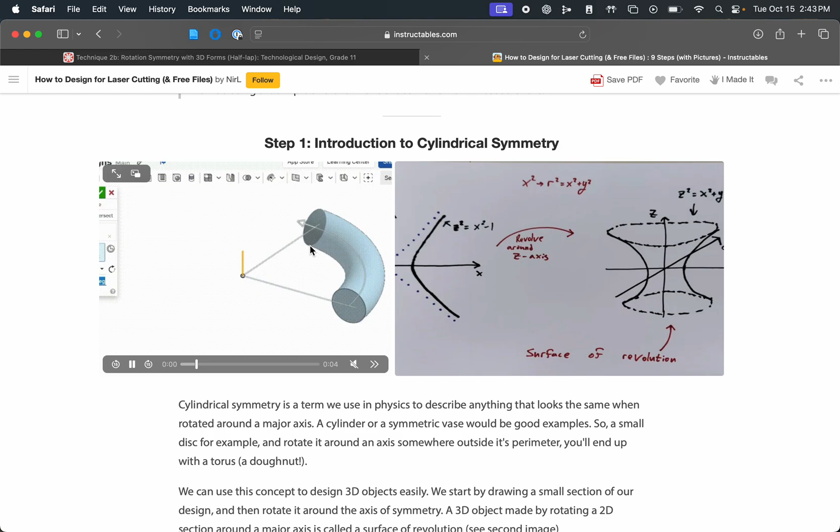So this Instructable is for Onshape, and I'd like to give it a try in Fusion. So I'm basing what we're doing here today off of this technique. We're going to be using something called the revolve pattern and the revolve tool and a circular pattern to create those flat slices and spin them around an axis.

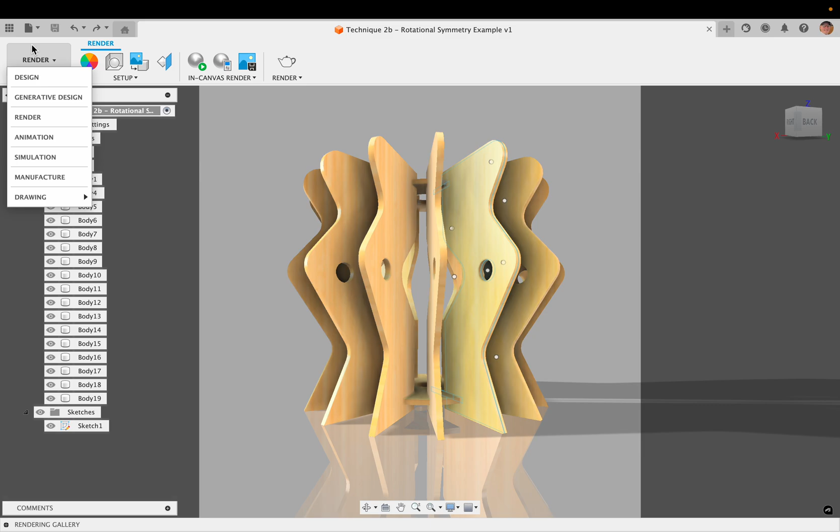Okay, so my example looks like this. I've got about 15 pieces here that I created, and I've got a top piece and a bottom piece, and all of those pieces are joined together. Let's have a look at how they're joined together. They use this half lap intersecting joint.

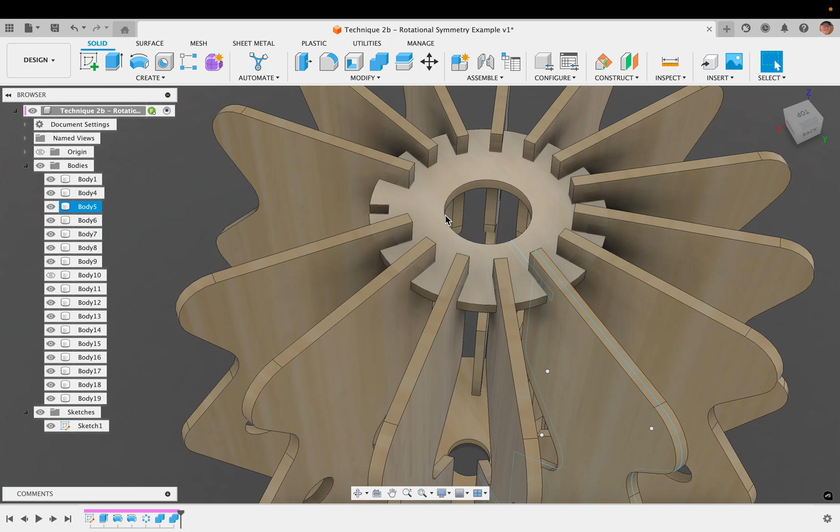And if I take this top piece and hide it, we can see that each of those pieces has got a cutout. And importantly, on this top circle, there's a cutout for each piece as well. So it wouldn't be enough just to do a slot on the one piece and not the other, because the position wouldn't be guaranteed for both pieces. So we need both pieces to fit well together. And of course, we've got that connection also on the bottom piece with the bottom slats as well.

There we go. So if we were to manufacture this with laser cutting as an example, then it would be really easy to put it together exactly as it was intended and exactly as it was designed. So let's start a new file. And I'm going to set up a parameter first. I'm going to press S, and I'm going to change parameters.

And really I need two parameters here. One parameter I need is the material thickness, because that parameter is essential to making these pieces fit together well. For now, I'm going to use exactly the material thickness, which would be 2.8 millimeters in my case. But if I have it exactly the material thickness, even considering what the laser cutter will delete, I still think that's too tight. So I'm going to round it to 3 millimeters. So this will be as per the material, plus a little bit of tolerance. Okay, so a 3 millimeter material will work well.

And I need to know how many copies around the central axis I want. And so for that, I need a parameter with no units, okay? Because it's just a number, so we'll just call this the count. And the expression to start with, well, we'll see what 15 looks like, okay? So with those parameters in mind, I'm going to start creating my sketch. I'm going to make a new sketch on the front plane.

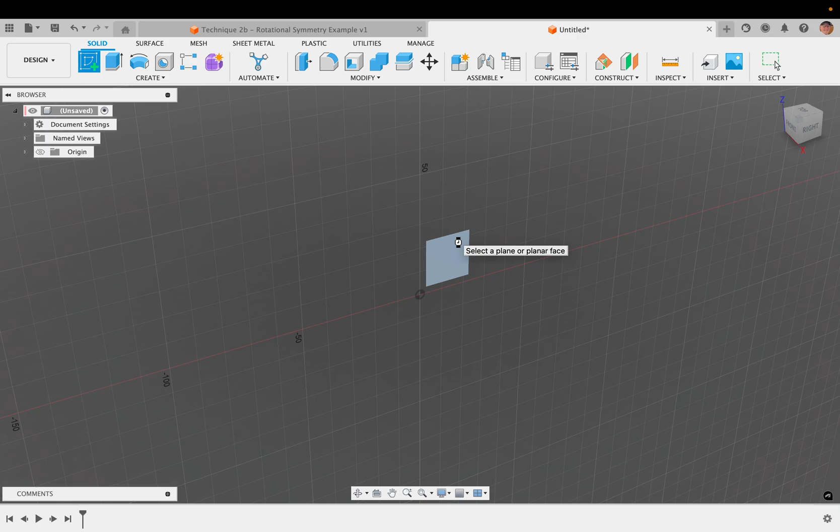And keeping my origin as the center point, this green axis here can be my central axis. I'm going to think about what my part that is going to be repeated looks like. And in this example, it's the section of my design like this. So what do I want this to be? And that depends on if I wanted it to be a vase or a lampshade, a holder, or an abstract sculpture of some sort.

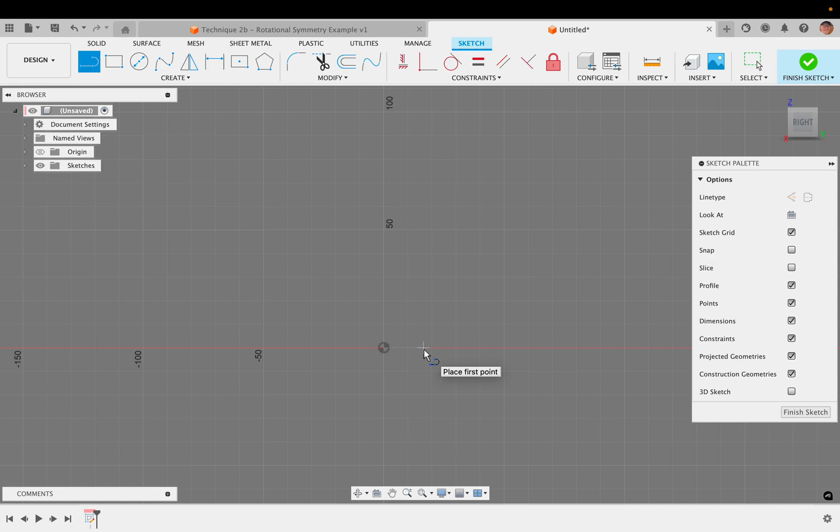So I'm going to use an abstract geometric approach. Okay, I'm not going to start on the origin, because the origin is the central axis through the entire thing. I'm going to start away from the origin, and this is going to be where the bottom of my first section starts. And that size I'm probably going to define, because I want to know exactly what that internal size is going to be. And then this width as well, to really give me a sense of scale here. To have something 50 millimeters will work well for what I'm envisioning.

And then for the internal size, I can do that by the grid. I can do it by eye because I have a line here that's 50, or I can just commit to 15 millimeters there. And that's what I'll do. Okay. And now I'm going to go up, and I'm going to sort of roughly plan how far I'm going to go up.

In fact, to do that, why don't I just pop in a line from the center axis that's vertical to the axis here. And this is just a sketch line, so I clicked on it and pressed X to make it a construction line. And then I'm going to give it a height of something that will help me envision what is the height that I want for my product. I'll say 150 millimeters. There we go.

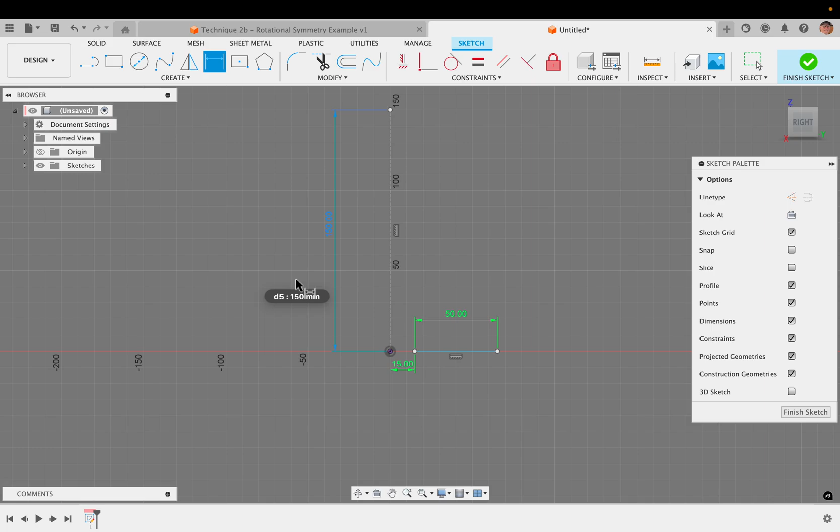So now I know how far I am from the center, how wide my bottom piece is, and how tall the overall shape will be. Now I can proceed with making my design for my section. Here I'm drawn to the idea of an abstract, jagged shape. Maybe it gets more jagged as it goes. Who knows?

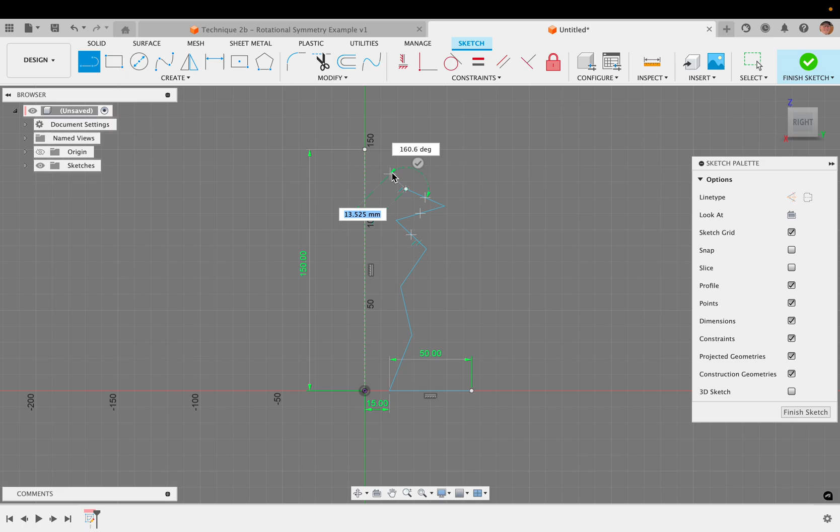Here I'm just hovering over my mouse cursor so that I stay in line with this target height that I set. And then I'm going to do a similar thing on the way back. I could, of course, incorporate other tools. I could use an offset here to capture exactly the size, or I could just proceed with an abstract approach and see how it goes. And today I'm feeling like seeing how it goes.

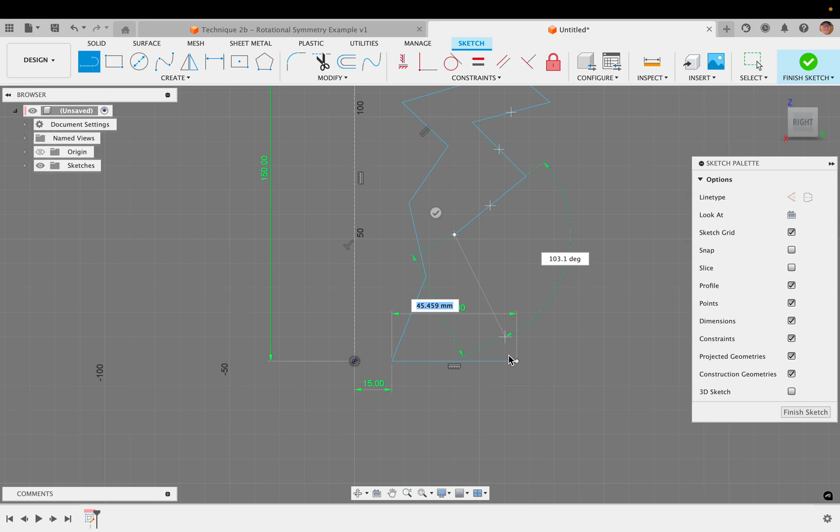This is giving me like Pikachu tail vibes here. Let's see what happens. Maybe lightning, maybe thunder. All right, and I'll just connect it to my bottom side. Now your section might look different. You can trial this with any kind of section you like.

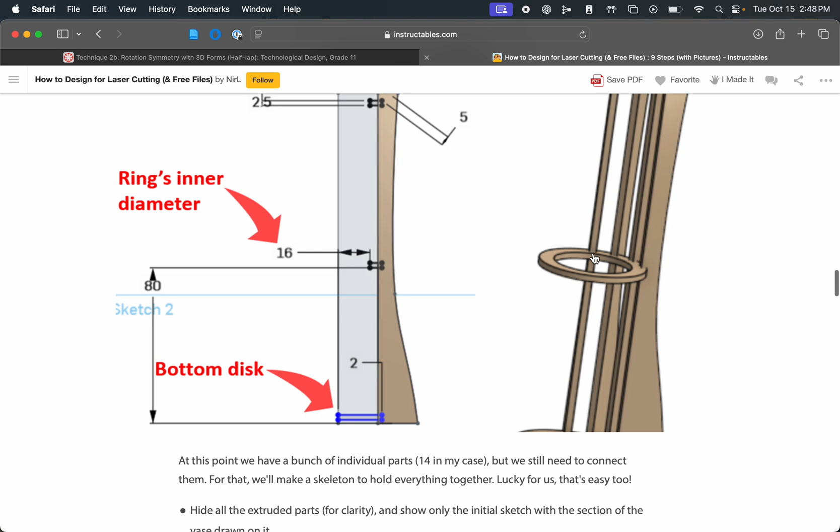Before we proceed, we need to plan where the cutouts are going to be for the central circles, and let me show you in this way. So these support circles here will also be cut from the same sheet material. So let's plan where they're going to go. I'm going to make 2, and the cross section of that circle is a rectangle.

So I grab the rectangle, and I can either connect it to the central axis and not have a hole cut out at all, or I can give it some space. And for this design, I'll give it some space. And I'm not starting from the very bottom either, because I want it to intersect with this piece. I don't want it to form the complete bottom surface.

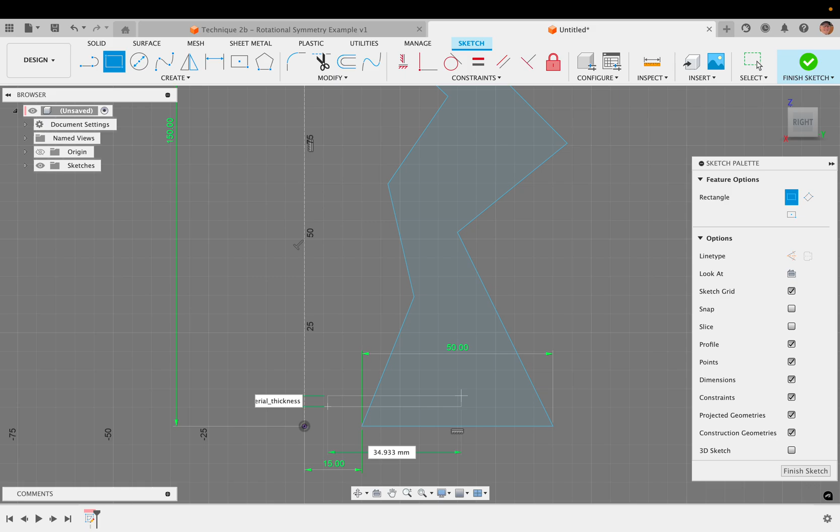The height of this rectangle should also be the material thickness. Okay? And then the distance here can be somewhat arbitrary, keeping in mind the relative size and scale of the rest of the design. Okay? So I'm planning for this bottom support circle to intersect roughly by this amount. And the overall circle is going to be this size.

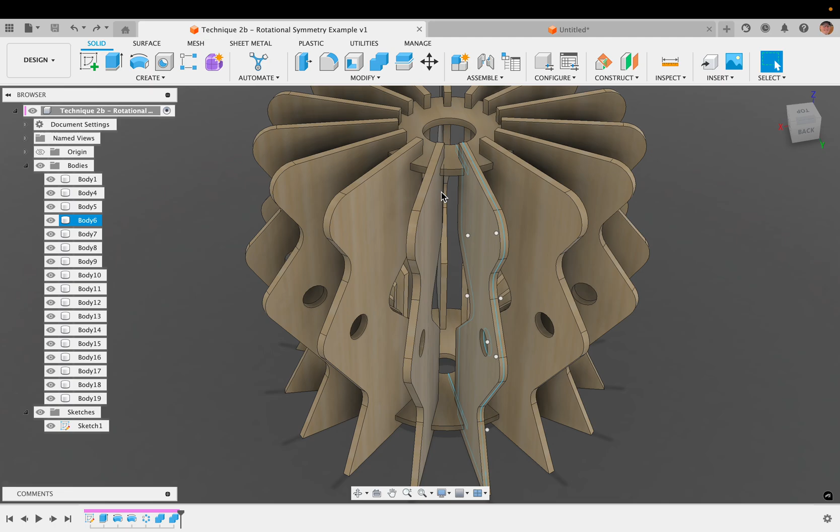But there's really one more thing I need to consider here, which is because they both are going to intersect each other, I'll show you with my previous example. Here we go. In my previous example, this rectangle forms the entire circle, but this part here is the part where they actually are going to intersect. So I'm going to draw a line from this rectangle on my working one so that I can plan to create this intersection.

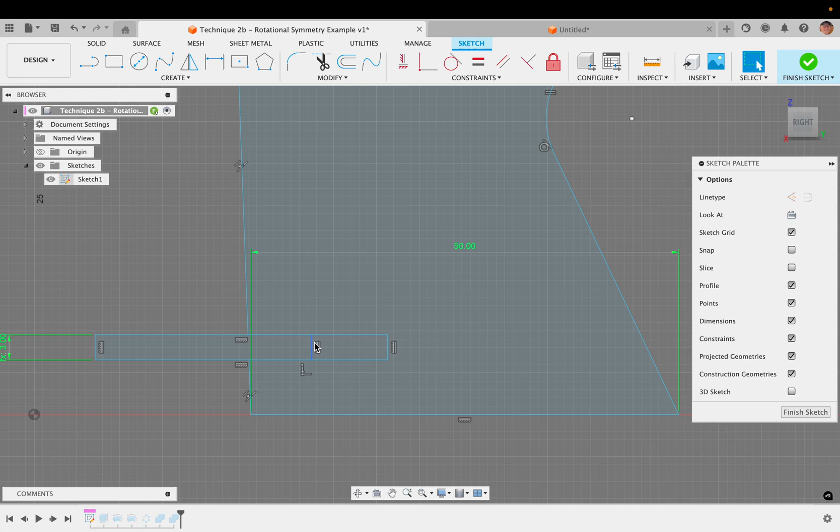Okay. One thing is it will be a little bit easier if I trim off this part so that I have my whole rectangle here. And that'll just make selection of the profiles more straightforward. So now I've got my whole rectangle. And now I'm going to plan where the actual intersection of these pieces go, which will be, in this case, roughly halfway between the edge and the end of my circle shape here. This is perpendicular, so I know that it is straight.

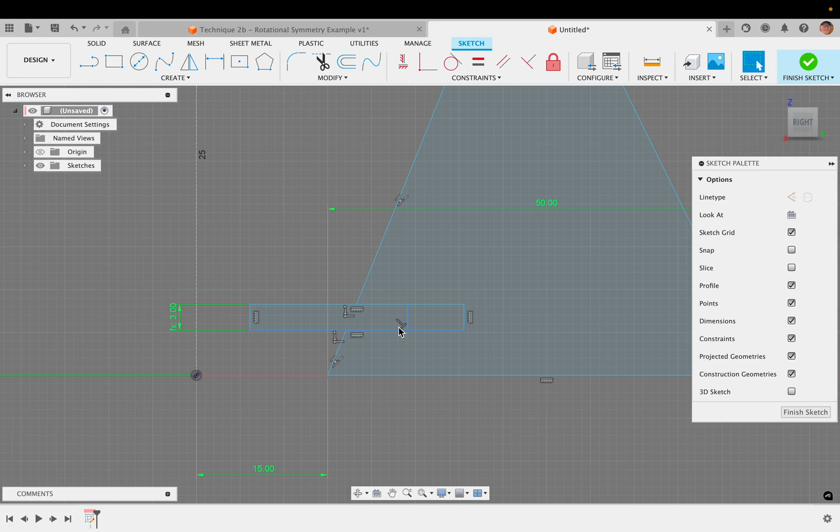Okay, I'm going to do the same technique for my other support circle. Where this goes exactly is really up to you. Where it is in reference to the central axis is also up to you, but better that you understand the technique first and then experiment with that a little bit. I'm thinking it would look good if it was actually in line with this sort of jagged edge here. So remember that this represents the material thickness.

There we go. And how convenient is it that I had a parameter there so I don't have to worry about remembering what that is and typing it every time. And I can change it all later. Okay, so I can move this around a little bit, and I'm happy with it.

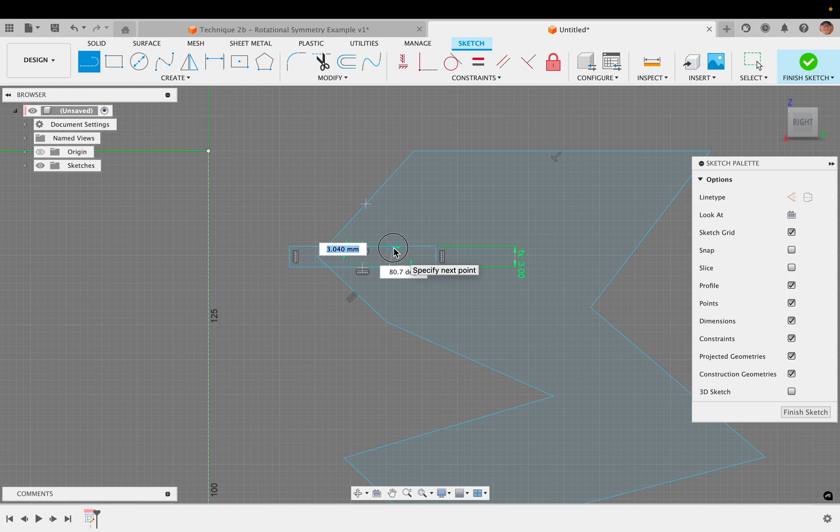So I'm going to also create a line here so that I can represent where it is being intersected. Now in this case, my line is not straight here, it's not automatically perpendicular, so I can fix that using the vertical constraint. Okay. The next step is to finish the sketch, and we're going to start to do an extrusion on this first piece, and we're going to create our parts.

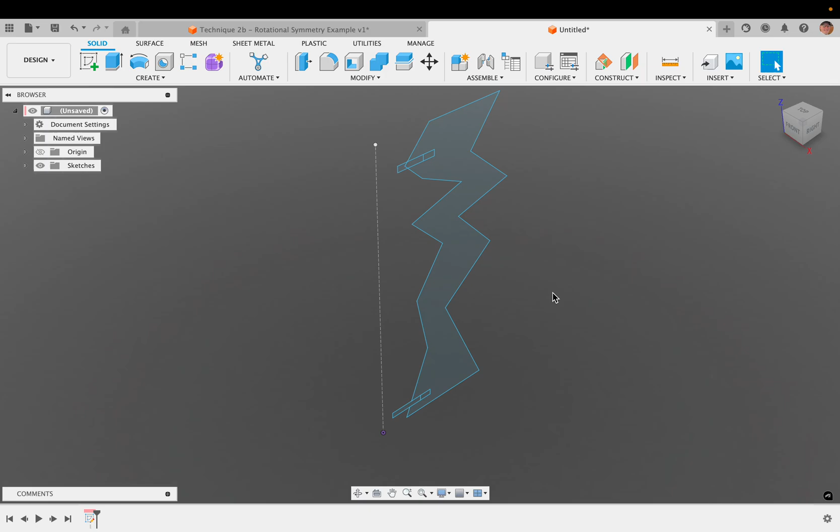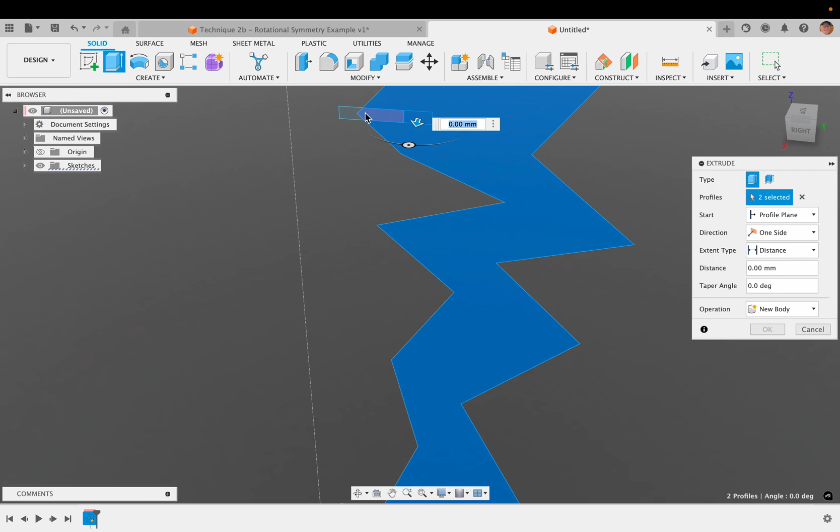The first thing I want to create is one copy of my section. I'm going to press E for extrude. And then I'm going to very carefully here select the profiles that I want. Now this part here is going to include the first cutout of our rectangle. Okay, and you can see I didn't trim this away, but this will work out. I won't go back and trim it for the video. We'll do it both ways. So this includes that first part, and then this also includes that first part.

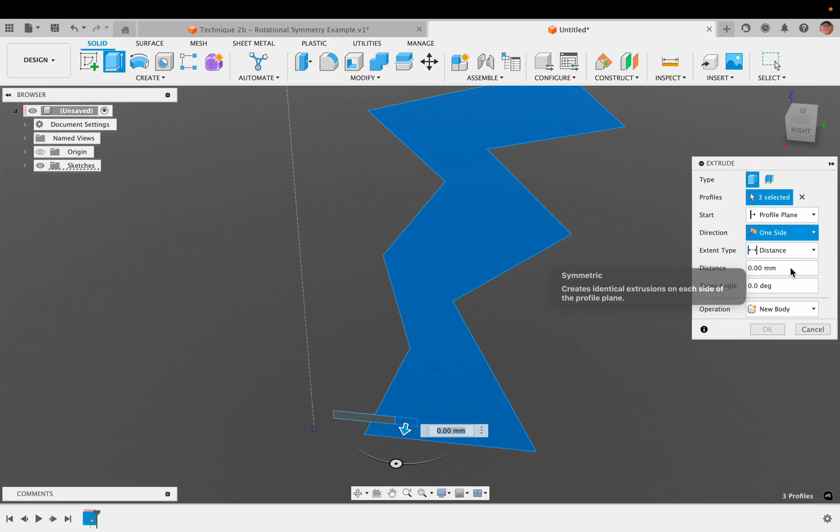All right. Now, the extrusion window here, I need to pay attention to the direction, and I'm going to make it symmetric, okay? The distance is the material thickness, and then the measurement is the whole length. What we're saying is that the sketch plane is in the middle. You can see that it's in the middle. And then symmetrically, we're going either side and we're measuring it by the whole length.

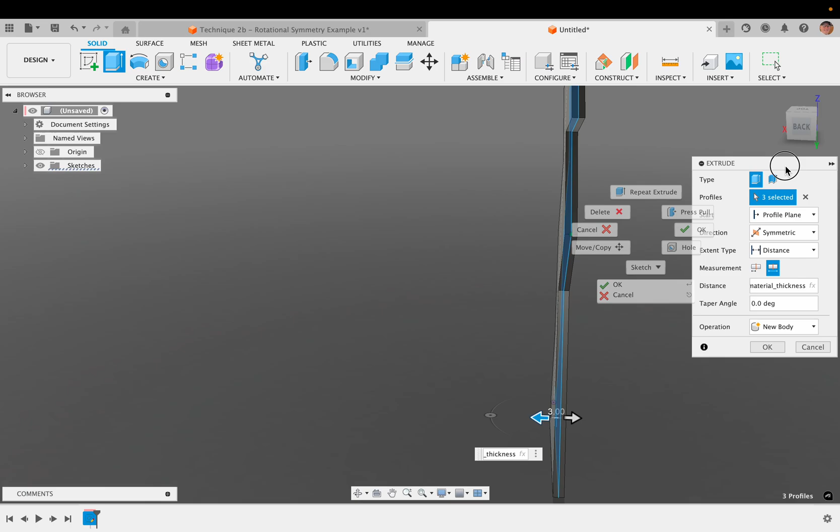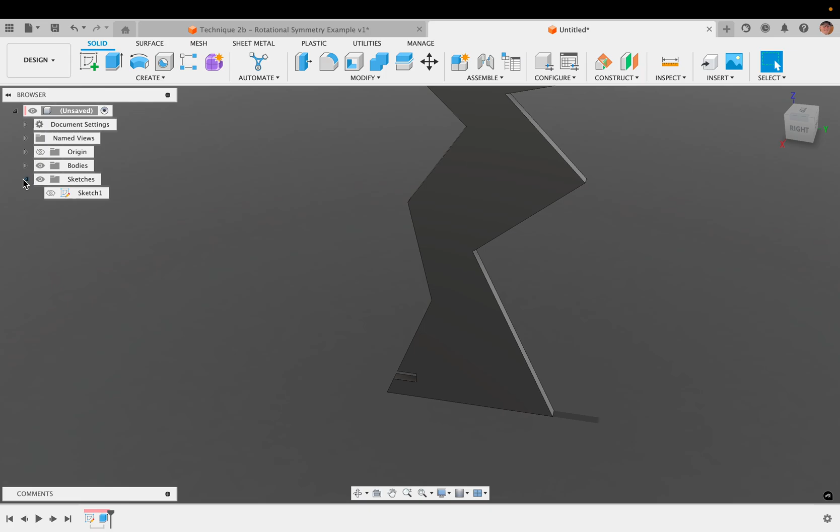If I was to do it one side or the other, then that would just change the alignment of my rotation. It still works out, but this really is the most representative way to do it. And that way the circle intersects perfectly with this section. Okay, so I'll leave that there, and I'm ready to create also my lower portion and my upper portion. The lower portion and upper portion, they come from a revolute command, or revolve.

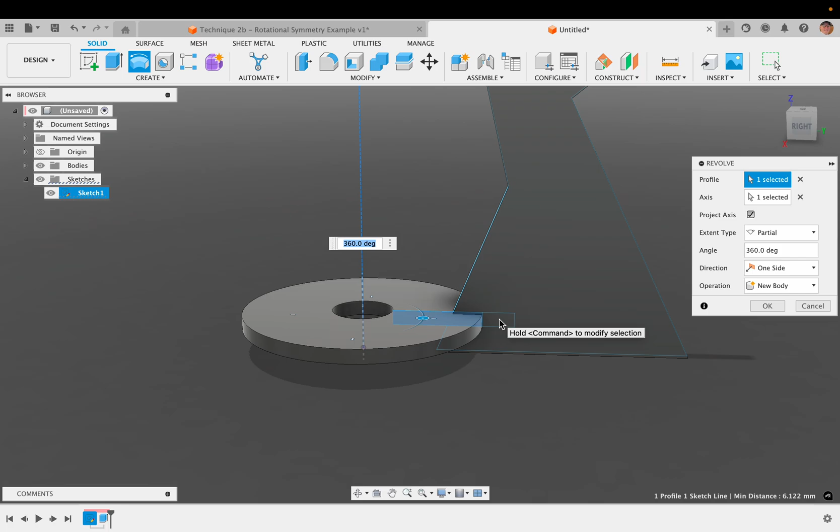If I was to revolve just this part, using the axis as the center, then you can see that my intended cutout section is not included there. So this is why we created that geometry. It's very important. So I'm going to include in this profile also this section here. Here I'm not able to select it at the moment, so I should be able to select it by long pressing and selecting it there, and then also including it in this section.

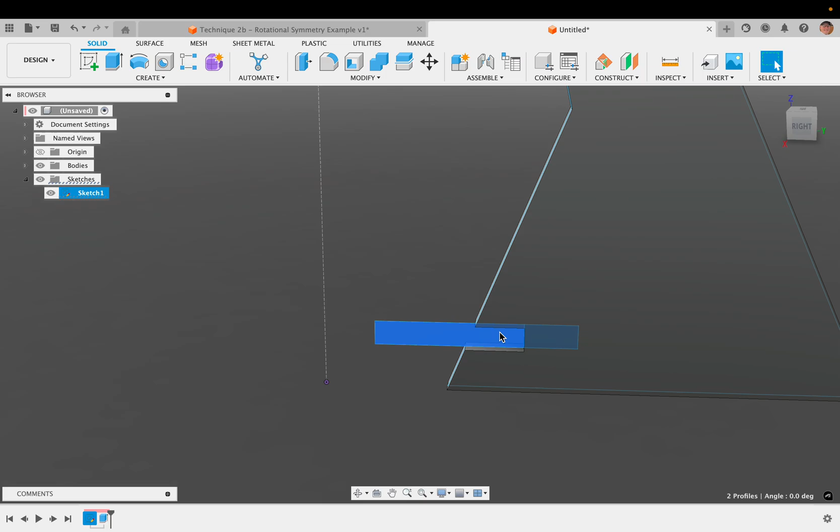Now, if that's not working, what we can then do is close the revolve tool. Why don't we just select it first? There we go, holding shift. Now the whole thing is selected. There we go, now we get the part. But the operation here is not cut, it's a new body. We want to make that a new body, okay? Making sure that your angle is the full amount, or we can change this to the full extent, okay?

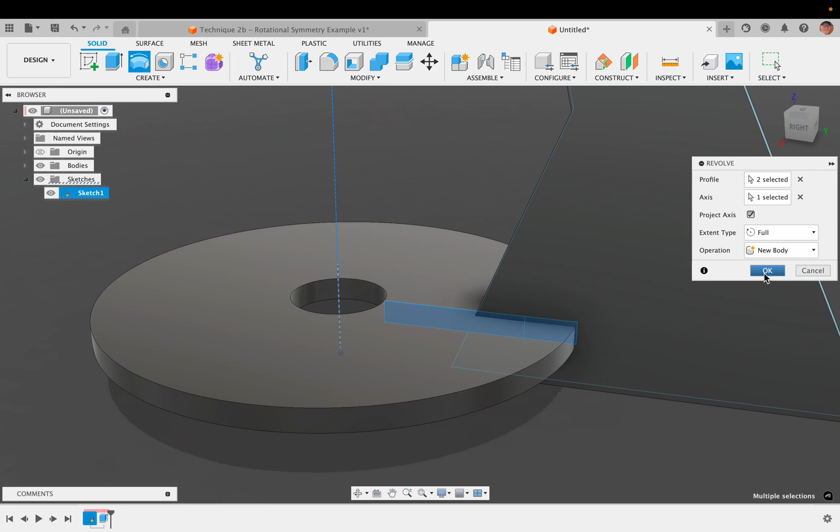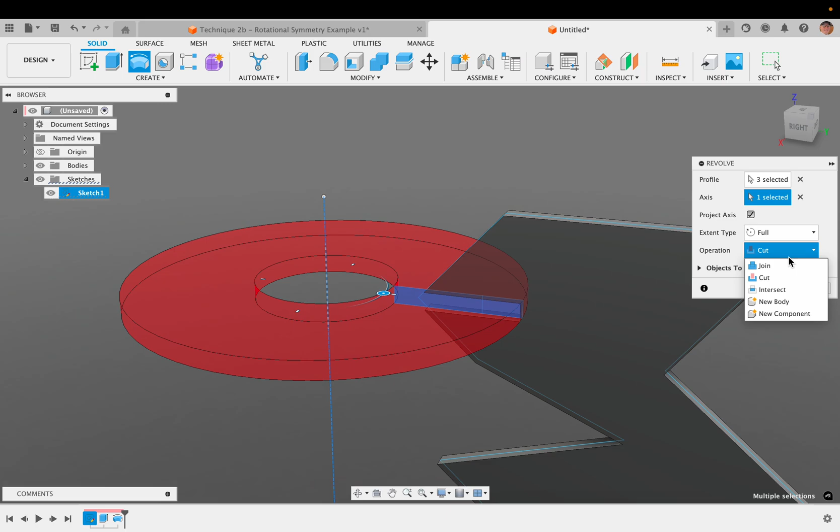So there we go. We learned that we had to select all the profiles first. I'll go up, look at this sketch, and I'll do the same thing. I'll long press to be able to select this profile, and holding shift, I'll press the rest. We'll revolve this around the central axis, and we'll make it a new body. The thickness is already the material thickness because we already configured that with the rectangle.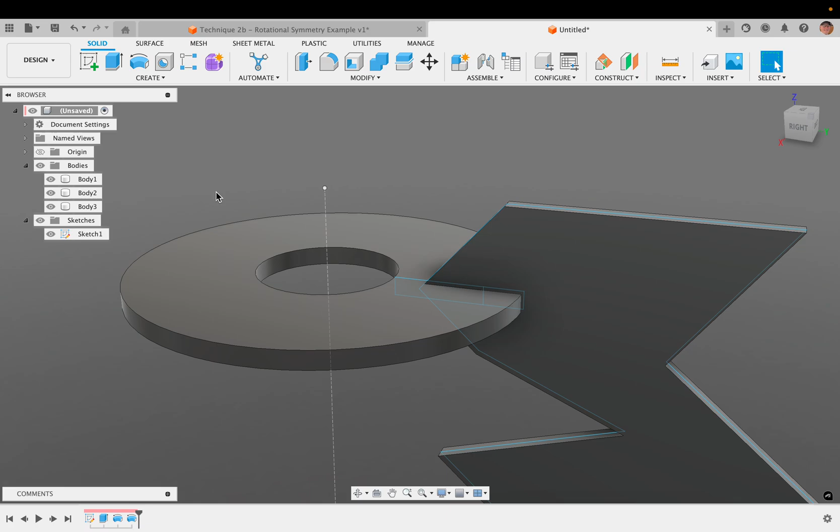Okay. Now if we open the bodies folder, we can triple check that we haven't erroneously joined them when we did the extrude or revolve commands, because we need these to be separate for the next parts. Now we have just the step of revolving this piece around the central axis, and then cutting everything so that they actually intersect properly with this top and bottom circle.

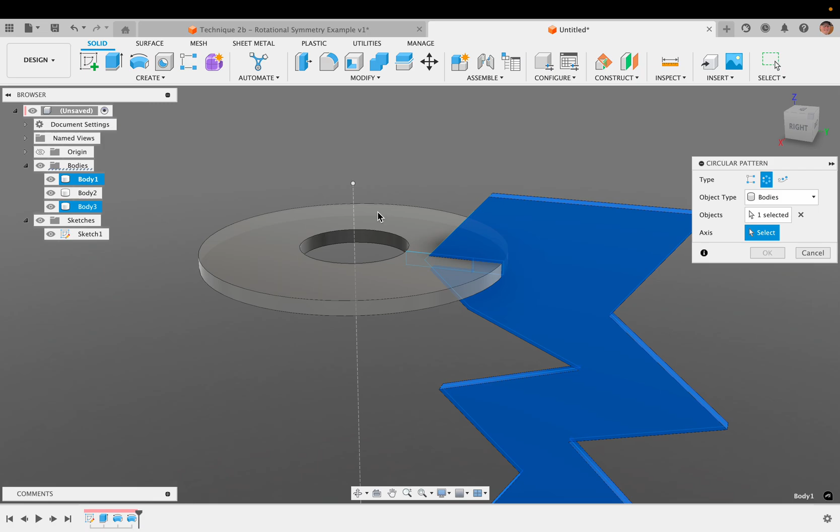So we'll use the circular pattern tool, and then we're going to pattern a body as a circle, this body around the central axis we made. There we go. And then for this we set up a parameter called count. Okay. Now we can hit OK, and we get our wonderful pieces. There we go. Very jagged, very sharp. We need to create the intersection of these sections with the top and bottom circle.

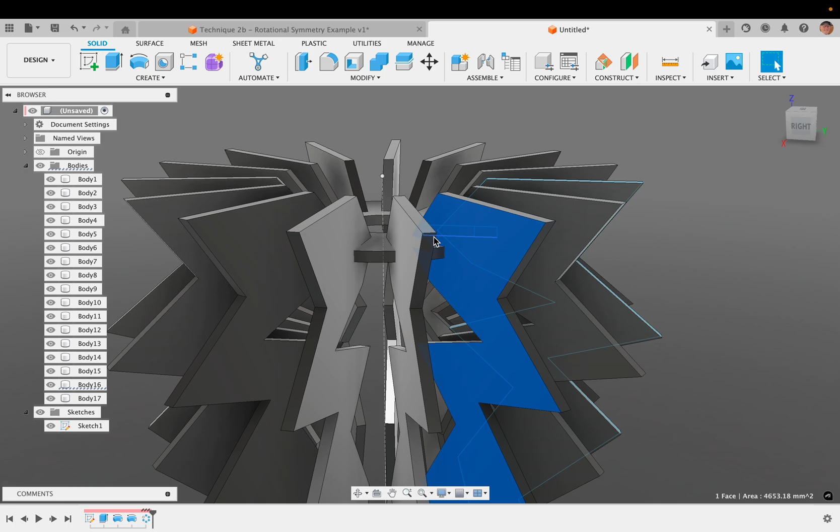So let's do that by using the combine tool. The combine tool does several operations. Here we're really more like cutting it, okay? It's a type of Boolean operation. We're targeting the top circle. The tool is each one of these.

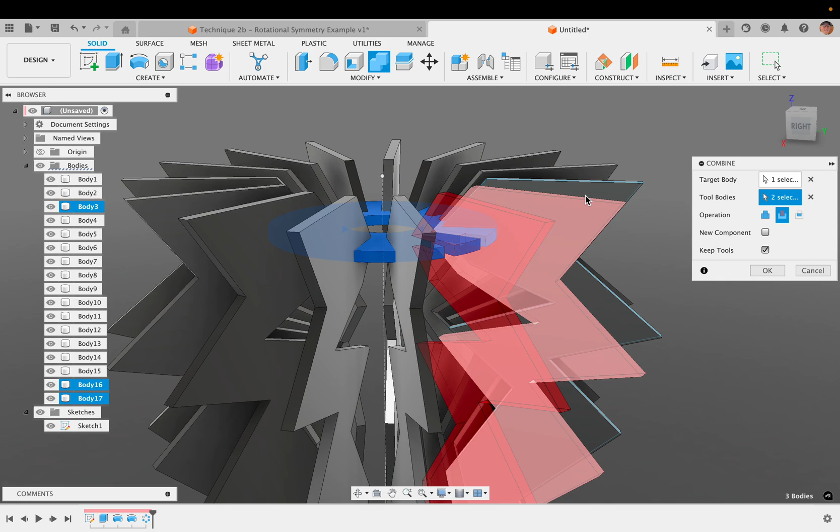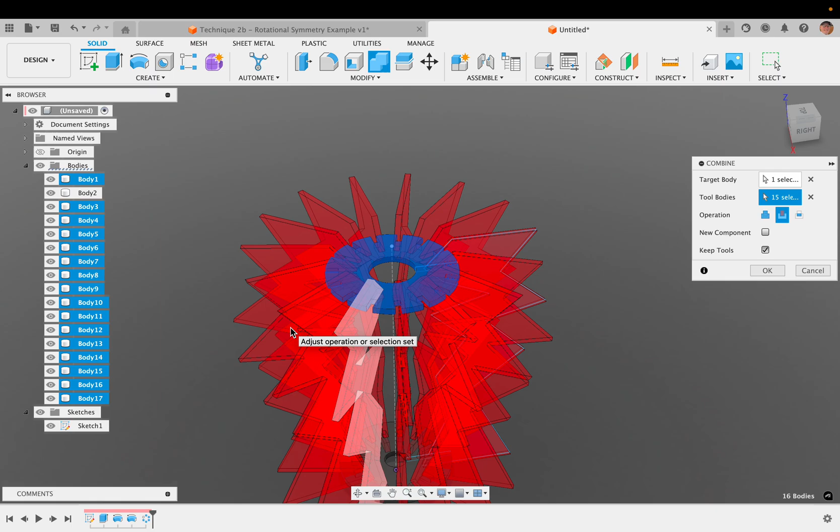There we go. If it becomes tricky to select them, we can just select them from the window. Okay, that is all of them. This last body that's not selected is the lower circle. That's not involved in this cut operation. The operation is a cut, and we're keeping the tools because we don't want these bodies to disappear.

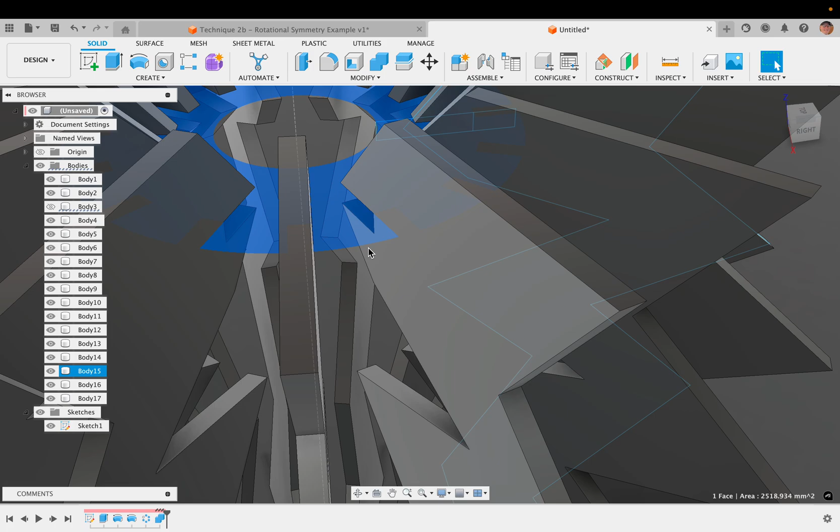Okay, so let's check and make sure that worked. If I take any of the bodies and I hide it, I should see that this intersection works, as does this one. So both of them are cut equally and evenly.

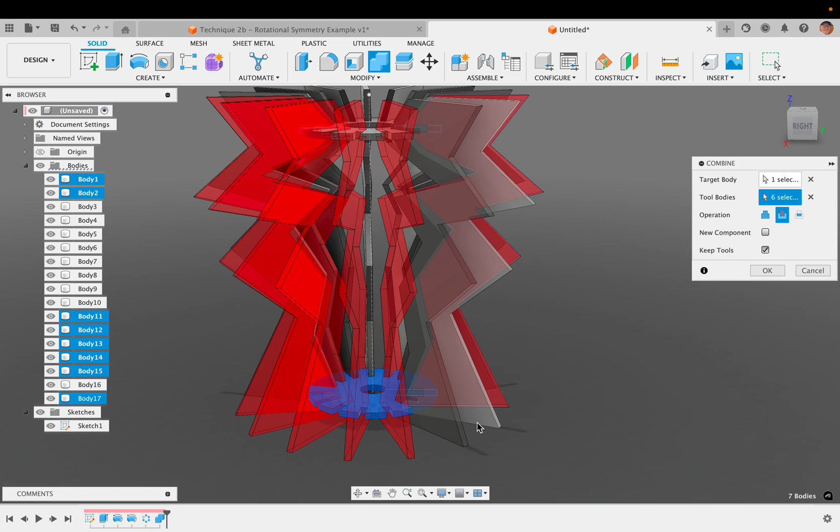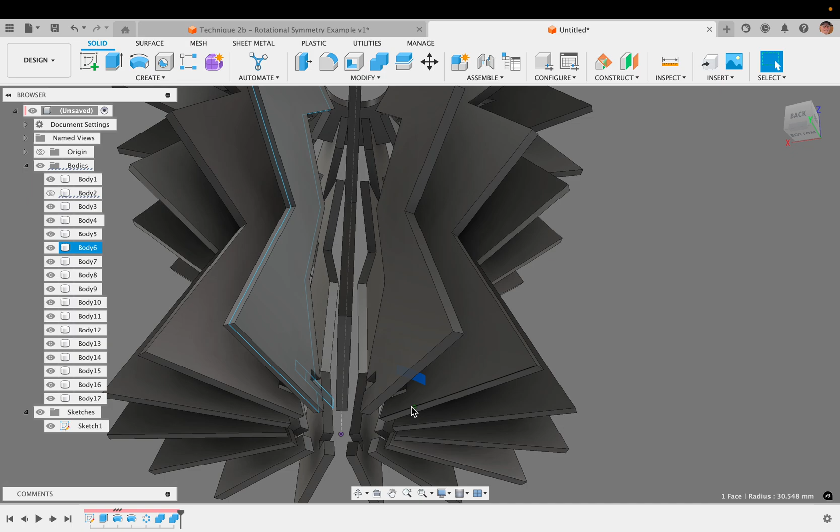Last but not least, we can combine: target, the thing we're changing; tools, what we're using to change it, checking the operation's cutting, and we're keeping them. There we go. And with that, we've got our completed rotational symmetry intersecting slice vase, lampshade, or other prototype.

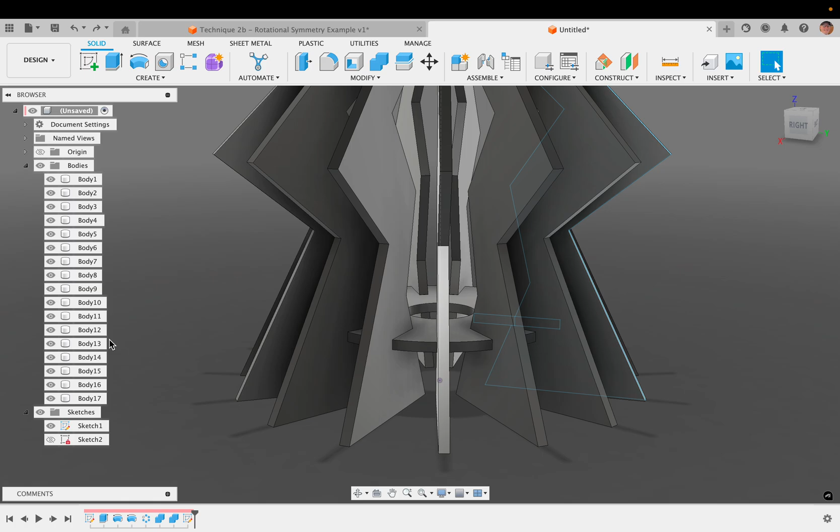So, some bonus tips on what to do now that you've completed the rotational symmetry. If we enable our original sketch that we used to create the section, we should be able to, even without editing the sketch, make some little tweaks about the size and shape. So if we find the rectangle that drives our bottom circle, one thing we can do is move it up and down, and we just have to be careful to still maintain our original set of features, which is maintaining both sides of this rectangle.

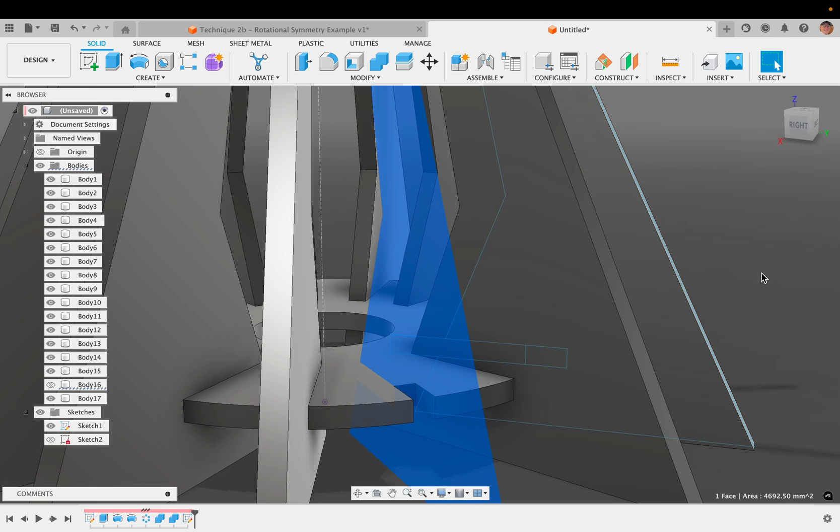But what this line does is it would actually change. There we go, you can see it like this. It would actually change where this cutout is, so how deep it is and where it begins, as well as the height and the overall size of the circle. Now if we go too far to extend it, I'll go even farther, that really changes what our original pattern was, so that doesn't quite work in this approach.

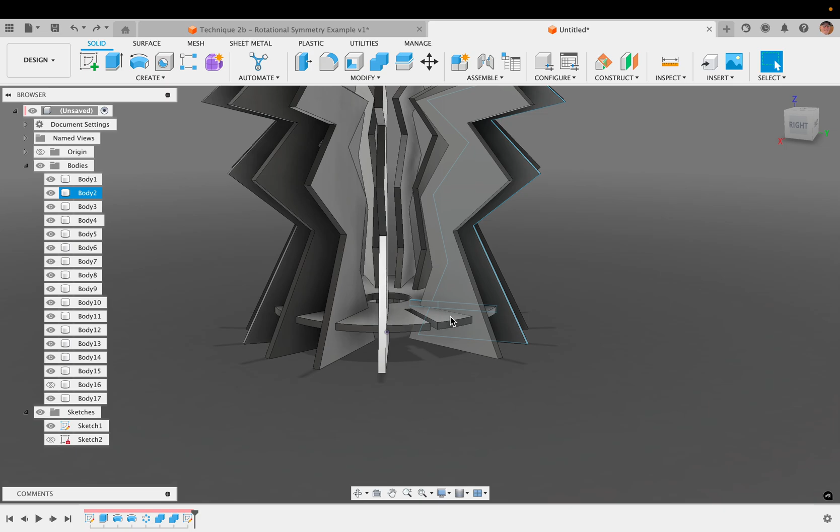But we can leave that one, and we can make some visual decisions about whether or not it was better with it smaller, with a hole that's really small. If I go too far, again, that breaks the revolution pattern, so I can edit that in the sketch so that it's perfectly aligned, and I could even get rid of the central hole if I wanted to bring that all the way. Okay, so that's one thing we can do.

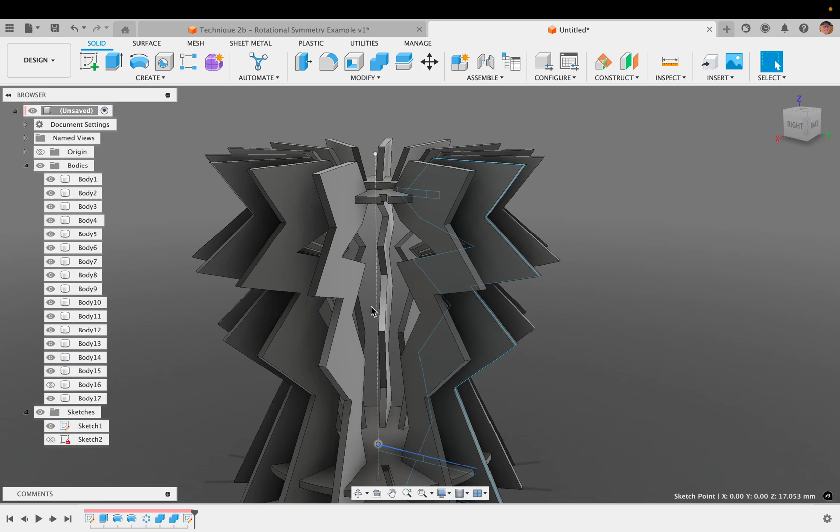We can do the same thing, of course, with the upper geometry as well. Looking at that quickly, make it bigger. We can change where the slot cutout is, like that. And then also, in real time, we can change the position of the section. We can change the position of the points. And since we're not really changing this profile, this can all happen dynamically.

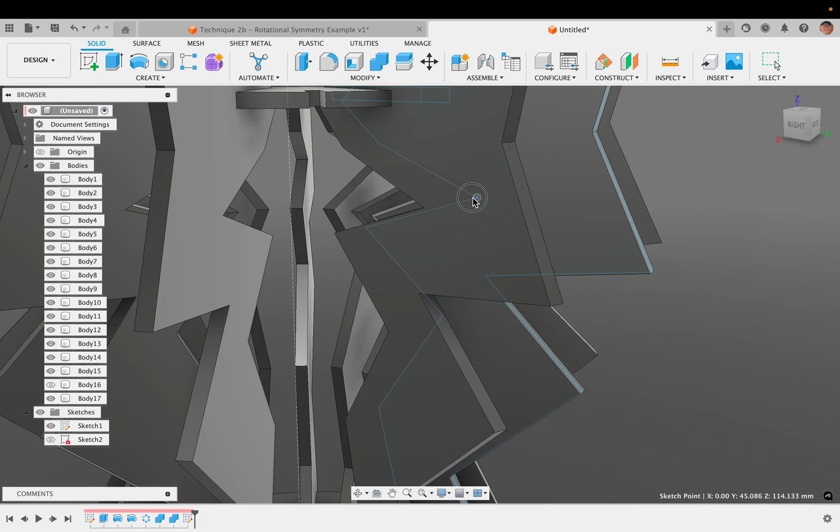We can make bigger changes as well if we go back to edit the sketch specifically, but we can definitely make these little tugs and tweaks without changing the original profile reference in the timeline. So we can make these changes, and we can look back and say, yes, that looks better, or no, I really wanted it to be really pointy and really crazy, and I really wanted to see what I could do with this kind of technique. And so you can really change it up.

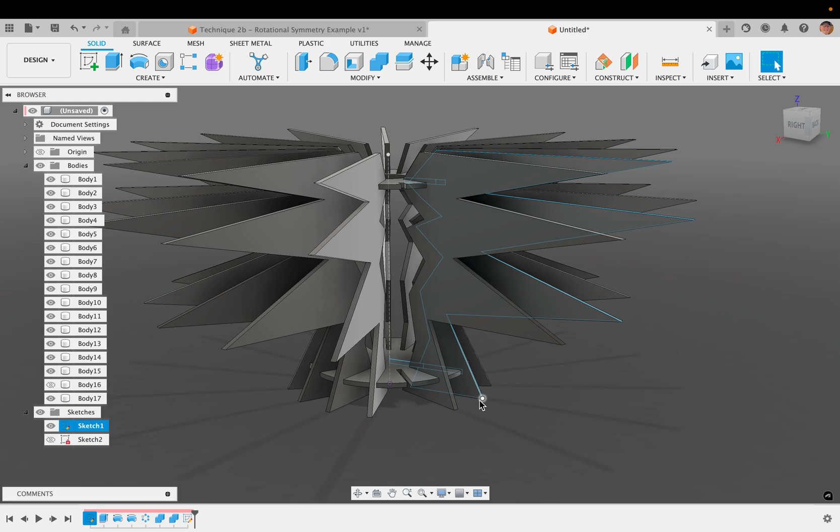And maybe we wanted to make it more Christmas tree oriented. Here this bottom dimension is set, so that means going back into the sketch and editing things. Now that I have the scale, maybe I'll just delete that bottom size, because that was helping me just understand how big things really were. And I'll start to bring this out, and I'll bring this one in a little bit. I can bring this one in even more.

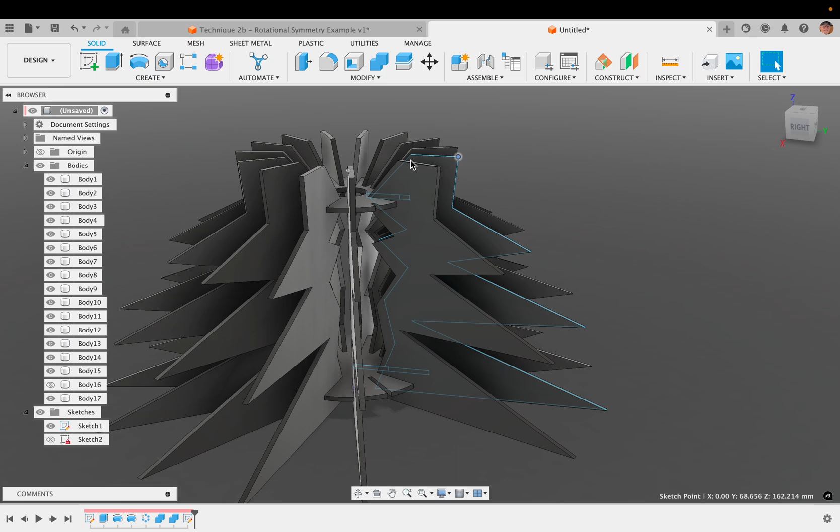It would help if I looked at this profile like this, orthographically, and then maybe I want to bring that up a little bit. And boy, now I really want to go back into the sketch and make this pointed, and then we sort of have a tree shape. So I encourage you to explore what it looks like to edit these final shapes as well.